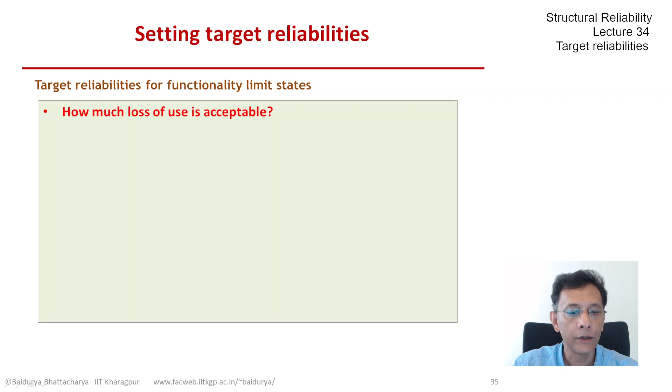So then details such as how much downtime, how much unavailability is okay when compared to the benefits that we get when the system or the structure is performing as intended. What failure consequences? So that was our first question. What failure consequences are to be taken into account? And since we are talking about economic loss in this case of functionality limit state, how much economic loss will be acceptable?

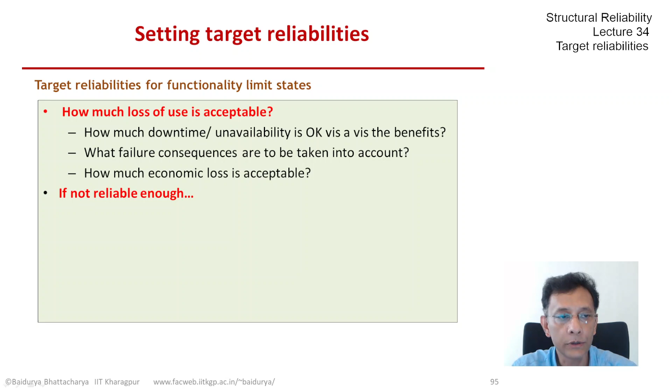And then a related question is, if I find that the item or the system or the structure is not reliable enough in that particular functionality, then do I need to, or am I willing to spend more to achieve the target that I want? And so that would also be part of the decision-making process, part of setting the target reliability. And then after the target reliability has been set, the user or the owner of that system, of that item, should be made aware of what sort of likelihood that item has in not performing its functions as intended.

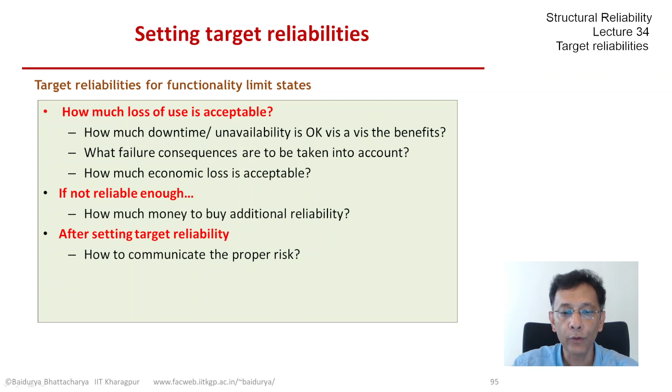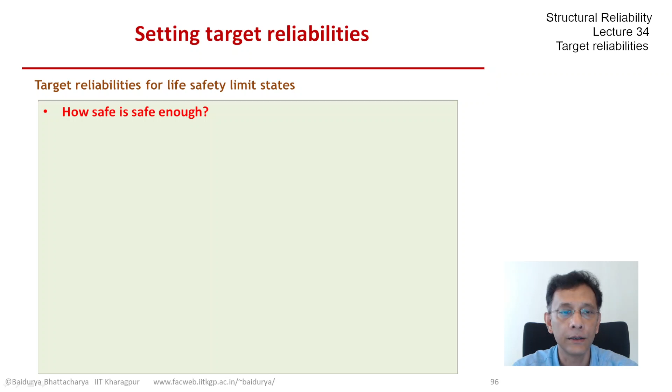So the word risk here is used in a technical term. As we will see soon, risk is the product of consequence times probability, or more generally the expected consequence. So that is target reliabilities for functionality limit states. When we talk about life safety, then obviously the question is central: how safe is safe enough? And we are talking about safety to life and limbs. So how much risk to life, to property, to the environment are we willing to accept? Because after all, we are getting some benefits out of the activity, the engineered system, the structure that we are talking about.

Again, just as we did in the functionality or serviceability limit state, what failure consequences are to be taken into account? Because that would determine, quite possibly, what the target reliability or maximum acceptable failure probability will be. So how much loss is acceptable, how to handle partial failures. Since we're talking about life safety, or ultimate, there could be stages of such collapse or such failure.

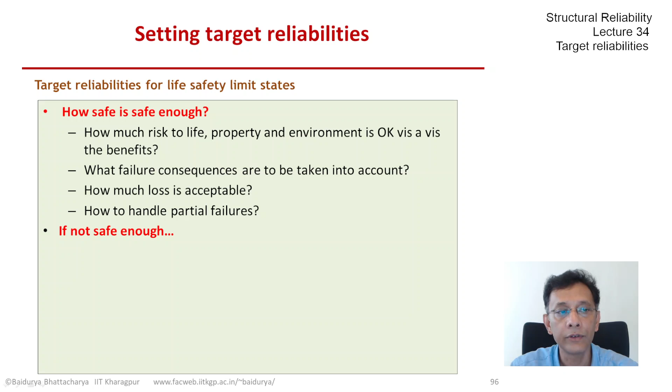Again, a similar question, as we did in serviceability, is if it is not safe enough, if we found that the existing reliability is not safe enough and we need to increase the target, how much money should be spent to invest so that we achieve additional safety? And then it's even more important than was the case for functionality limit state.

In life safety, we need to communicate the proper risk, and that's an important job, because when engineering interfaces with society, this sort of communication is very important. And one needs to keep in mind when making this communication that there are differences between the actual risk and perceived risk. Risk, again, being used here in the technical sense that it's the expected consequence.

And there are reasons why such differences exist, and even if the risk is tolerable now, it may not be tolerable in the future. People's expectations change. The public may expect the engineered systems, the structures, to perform even better. Failure may be even more unacceptable in the future when presumably society becomes more affluent and expectations increase.

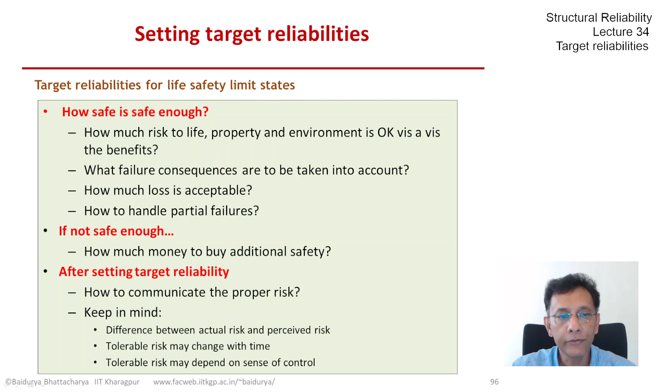But even before this, there are some essential problems that we need to address when we talk about setting target reliabilities for structural systems and structural components. And I have listed them here. We have discussed, stated, realized these facts throughout this course. So let's list them one by one. There are 3 or 4 of them that I'd like to present in this manner.

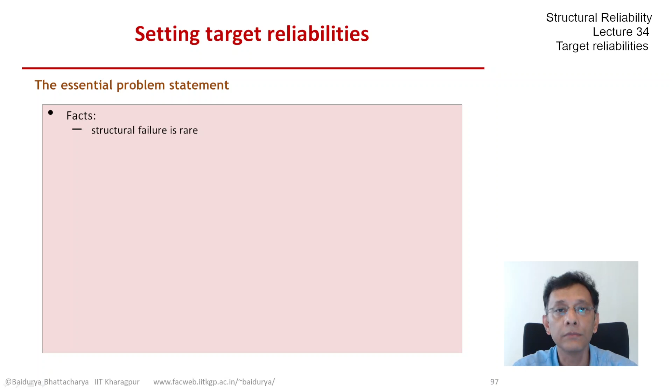First, structural failure is rare. We understand that, we have almost taken that as a given, and we would like structural failures to remain rare, if not become rarer. The other fact that we also realized through this course is that large-scale testing is the bedrock of many reliability programs, but for structures, for buildings, bridges, ships, testing of nominally identical units to failure is not possible. That's also something we understood and we agree.

We can, however, test components, subsystems, beams, columns, joints, slabs, panels, even scale models to failure. But what we get through those tests is the member strength distribution. If we like, we can get modeling uncertainties, but what such lab tests don't give us are the actuarial failure data. So real observed failure data are not obtained from lab tests, even if performed in large numbers.

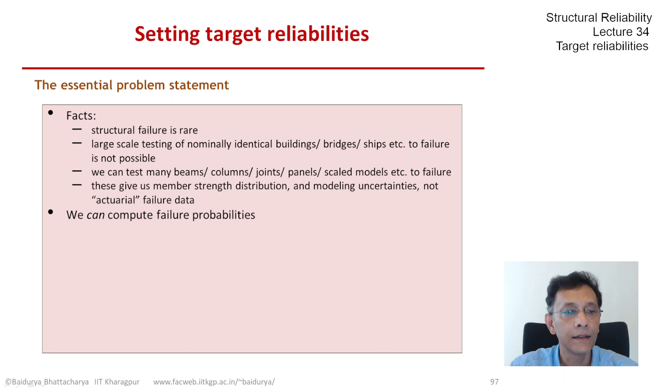But we can compute failure probabilities. That's what we have spent a good amount of time on in this course, and we are confident that we can compute failure probabilities of components and systems. But then there are questions, and these are what I call the essential questions, the essential problem statement: can the computed failure probability be compared and verified with the failure probability based on failure data? Can we compare them? Are they done on the same basis?

Because this is a question that needs to be answered if we can compare. Is our physics so accurate? Because we are doing a physics-based approach to failure, physics-based computation of failure probabilities, limit states, and so on. So is our physics so accurate that if we can actually compute the failure probability, whatever the answer, we can compare with failure probabilities coming from failure data, actual field data, observed data, and see if they are satisfactory or not?

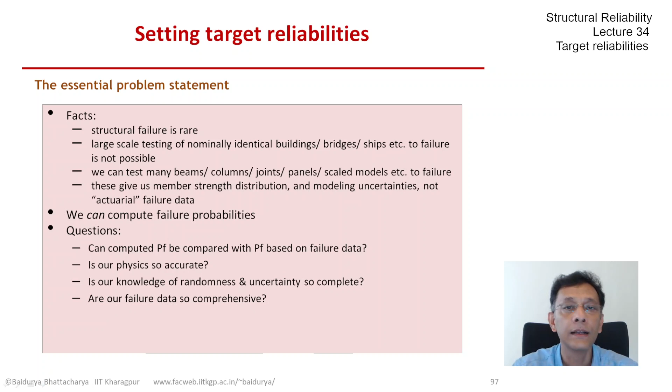Is our knowledge of randomness and uncertainty so complete? Because that's the other part of the knowledge that we are using along with the physics in computing failure probabilities. And if we are able to compare the computed PF with the observed PF based on failure data, are the failure data so comprehensive? In other words, are the failure data so representative that we can compare a computed PF with it and decide if the computed PF is good enough or not?

Finally, we go back to the first question at the top of this slide. Structural failure is rare, okay, but is it rare enough that we can make the observed PF the acceptable standard?